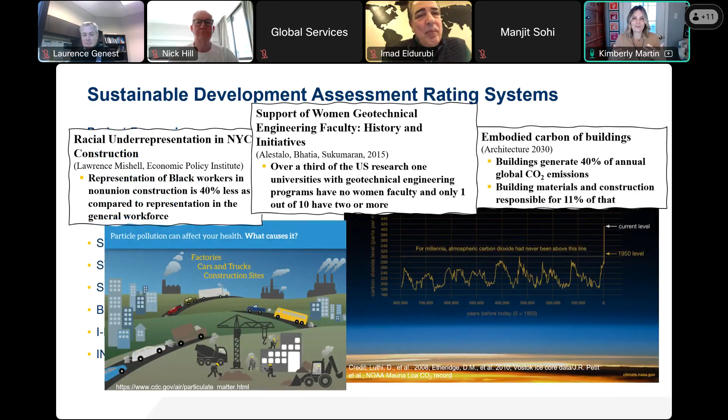So this is just not something a lot of engineers are regularly working on. And I don't want people to think that because we're not working on a LEED or Envision certified project, that project can't be sustainable, because we have a lot of issues coming from the construction, building, and infrastructure world. We're not going to be able to fix this and do better if we're waiting for projects that are LEED or Envision certified. We have to just do better all the time.

So how do we do it? I like to use the United Nations Sustainable Development Goals as a framework for companies and organizations. So instead of saying this project will do this, we can now say, as a company, we're going to do this, and we can take these SDGs and use them as a framework, which many people do.

They also align with a lot of sustainability reporting standards. We like these UN SDGs because they're universal - every country that signed on to the United Nations has signed on to these UN SDGs. And also they're holistic, so they're not just covering the environment, they're also covering social and governance as well.

They can be overwhelming, since they cover everything. There's 17 of them. However, a company doesn't have to choose all 17 to address right at the start.

You can say, hey, we need to really focus in these areas. A lot of companies start with number 3, good health and well-being, because for us in construction, safety falls under that, and that's something we're good at focusing on. Then gender equality, since we know we need to increase diversity, responsible consumption and production, which is really important about resource use, and then climate action, of course. So you can break this down and make it more specific to your company instead of trying to bite everything off at once.

Once you decide what to do, a company can make commitments and targets and say, we are going to reduce our waste, or use more recycled content, and this is what we want to do by this year. We can set that and share it with our employees. Then we can start reporting externally, get a rating and assessment, and be transparent to our stakeholders. When we take this company-centered approach, I think it's much better than the project-centered approach, because now we can say, as a company, we are going to do this, we are going to set targets and do better. And that's going to be on every project and everything we do.

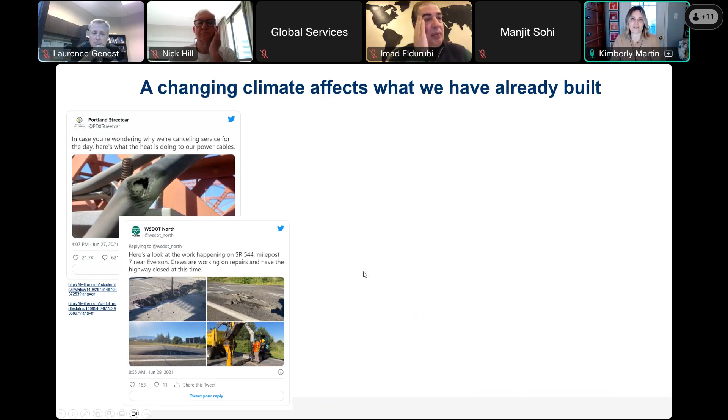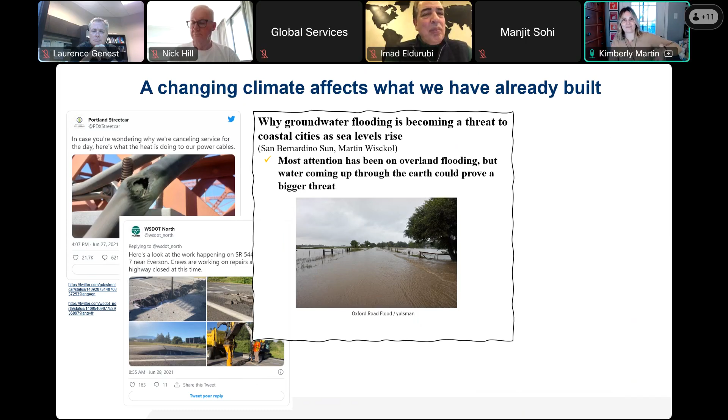We also have things like sea level rise that many of us have heard of, but we often forget that if sea levels are rising, we'd have an associated rise of groundwater flooding right next to that sea level and inland further. We have a lot of things buried underground, like pipelines and tanks, that will now become buoyant and have more buoyant forces acting on them. So that's something we need to think about as climate change happens, but also thinking about the things that have already been put into the ground.

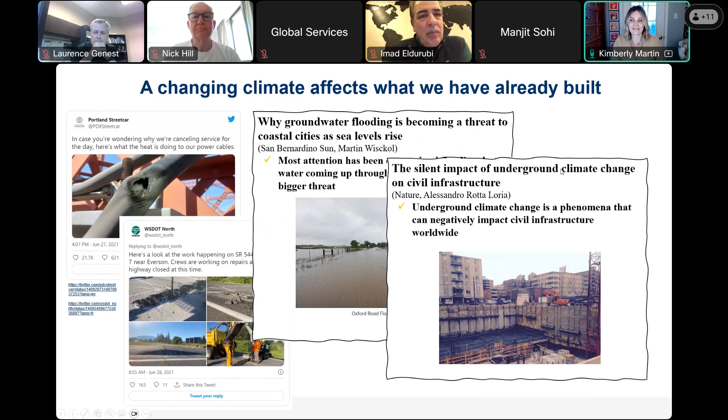There's also really interesting research coming out of Northwestern University by Alessandro Rotta Loria, talking about how we're also experiencing underground climate change. This has been well documented by Professor Rotta Loria in the Chicago area, showing how the ground is drying out from the urban heat island effect, and buildings are settling at an increased rate because of this. So we're often thinking of climate change in the future, but we do have to look back and think about the things we've already built, and hopefully help try to stop this.

Climate change also affects how we work. Many people remember two years ago, the summer the Canadian wildfires brought smoke down into the United States and made it really difficult for workers working outside in the construction industry. Obviously a lot of what we do is outside. But it also happened a couple years before that, where wildfires on the west coast of North America brought poor air quality to the east coast. So when we think about wildfires, that's not an isolated event in the outback of Australia or in the Western United States. That smoke can actually impact how we're going to build and get work done in other places that are unexpected.

Also, worker injuries tied to heat are vastly undercounted. We have to get these buildings and infrastructure built, and that's what we're trying to do, but our workers are starting to suffer because of the increased temperatures during the day. Even further, particularly in climates that are more temperate and weren't expecting such heat, the nighttime temperatures are rising.

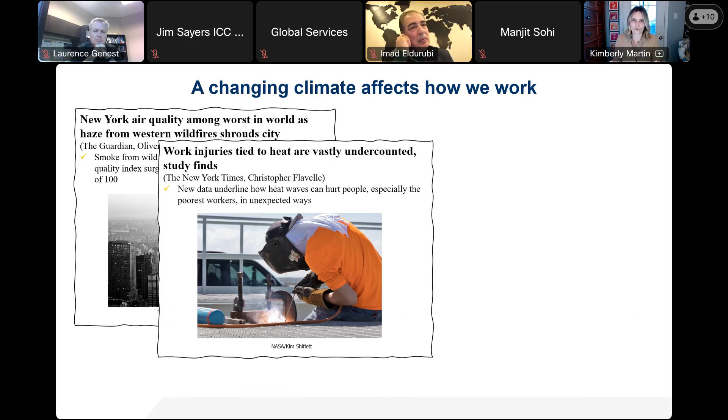So our workers are going to work, getting exhausted, going home. They may not have air conditioning, and now their body's not recovering at night, so that's just leading to even worse heat-related illnesses.

I also want to think about what it means for things like our supply chain. We had this hurricane come through on the U.S. Gulf Coast, slamming the region, particularly Louisiana, hitting them very hard. This had a direct impact on Keller in a couple weird ways. One, we were working in the Gulf Coast and our projects were shut down for upwards of 30 days because of the flooding. But also there are a lot of chemical plants along the Gulf Coast, and we use things like PVC pipes in our drilled shaft foundations for specific testing we have to do, like gamma ray logging. We couldn't get those PVC pipes because those factories were shut down.

So thinking about how climate change is going to affect how we work, it's not just physically how we're going to do the work, but also these supply chains. There's great research out of MIT saying climate change will disrupt supply chains worse than COVID. We could say during COVID it was actually both things, but the best way to limit the impact on supply chains is for companies to be proactive in reducing their own carbon footprint.

And lastly, I want to say that climate affects the types of projects proposed for the future and how we're going to build them. There's lots of money coming from state and federal governments supporting renewable projects and resiliency projects. These are very specific types of funding, encouraging how we're going to build. I heard you talk about home building—there's also regulations about home building and sustainability coming out depending on the jurisdiction. And you have things like New York City saying we're not going to allow supply of natural gas and oil in new buildings being built. So how are they going to do heating? We'll talk a little bit about that later.

So these are the reasons why we need to change. What does it mean? How do we do it? Well, when we approach how we can change what we're doing because of climate change, we kind of look at it in two ways. The first way is adaptation.

I think we see this in a lot of codes—how can we enhance resiliency? We typically see that through armoring and strengthening, controlled failure, relocation. In the geotechnical world, we think about this for earthquakes and liquefaction mitigation, where if we have a building that's going to be built on liquefiable soil, we can improve the soil so the building doesn't fall down, or improve it enough so there's egress in case of an earthquake, or we could just not build there. For those of you, I think there's at least one person from New Zealand, that's what happened after the Christchurch earthquake—there are huge swaths of land where the government said we're just not going to build here anymore because of the liquefaction. So this is adaptation, all these different approaches. What we're trying to do with adaptation is prevent the worst case damage scenario.

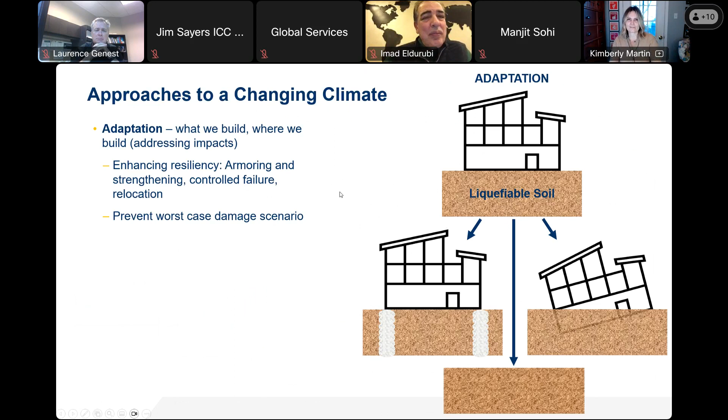The other way to look at it is mitigation, and that's how we build. So here is where we're getting to addressing the cause—our building materials of the future are going to be different, because we need to think about net zero and reducing our own impacts as an industry and as companies.

So here we're considering externalities when it comes to decarbonization. It's not just the materials, and you'll see why in a little bit, but also how much fuel are we using to build something? What's the travel associated with this and what's the carbon impact? What kind of electricity and fuel are we using on site?

And are we designing for the future for the building during construction? So when we mitigate, we want to prevent the worst case climate scenario. When we're adapting, we don't want to do that in a way that makes the situation worse. If we do need to adapt, we want to mitigate at the same time using those low carbon solutions to prepare for the future.

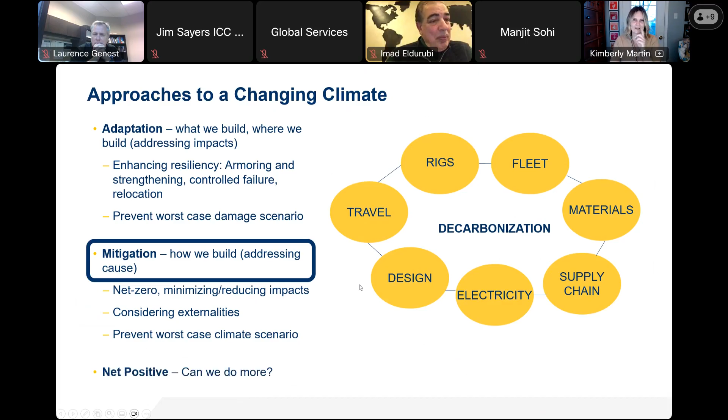I'm going to mostly talk about mitigation today. I'm sure you guys hear a lot about adaptation in terms of codes and adding resiliency, but mitigation, addressing the root cause, is something I think we can have a big impact on, and I'll show you how. I also will touch on maybe how we could be net positive.

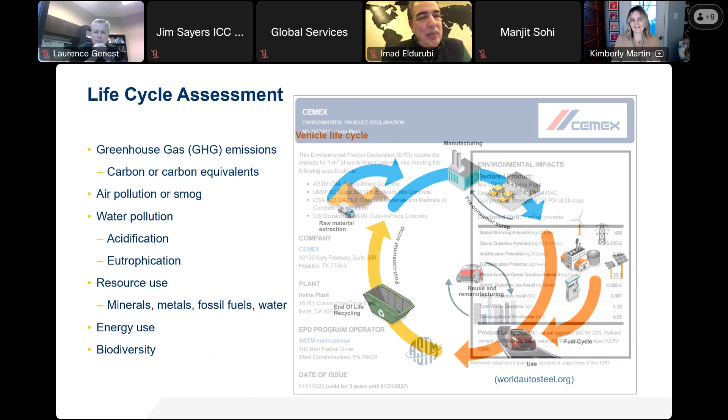You might see this type of thing coming up in the building industry with environmental product declarations. Environmental product declarations come from the suppliers, and they're telling you the life cycle assessment from cradle - resource extraction - to gate, so before that product, once it's finished, before it comes to your construction site, what are the environmental impacts of that product? And they're really, really great. You can see here, just for climate, it'll tell you, for example, in concrete, 1 cubic meter of concrete, in this case with this mix design, has 426 kilograms of CO2 per cubic meter.

So these life cycle assessments are wonderful. They have so much information. For climate, a great place to start is just to look for the CO2 emission. And there's other ways to get that information as well if you don't have an environmental product declaration.

For the geotechnical industry, we have an industry-specific and industry-developed carbon calculator that we use. It's free if you just want to take a look - it's at geotechnicalcarboncalculator.com. But there's a lot of these you'll see coming out of the ASCE in the States, the American Society of Civil Engineers. The Structural Engineering Institute has SE 2050, and they have their own carbon calculator. The Associated General Contractors of America also have their own carbon calculator. So there's lots happening because it can be hard to do this on your own.

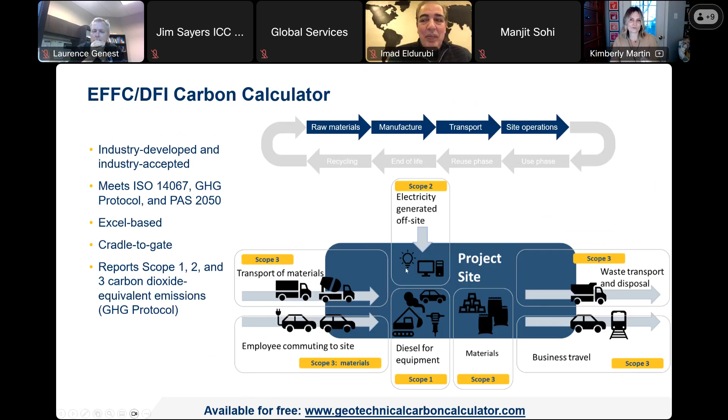Scope 1, 2, and 3 are how the Greenhouse Gas Protocol defines carbon scopes for companies, so you might hear about it. Scope 1 are the emissions from the fuel we use. Scope 2 are the emissions from the electricity we use. And then scope 3 are emissions from everything else that comes onto a site and how it gets there. So these carbon calculators are great because now we can really start to measure it in an easy way.

You can embed things like an environmental product declaration if you know what materials you're using, but also they have the general emissions factors for those materials, the generally accepted emissions factors coming from databases like EcoInvent or EC3, if you've heard of those.

What I like about our industry-specific calculator for geotechnical engineering is it has these simplified ratios. It can be confusing for designers to know how much fuel would be used on a construction site for a specific foundation type. So this calculator can help them use ratios from case studies, so they don't have to know all the information—they mostly have to know materials.

But also these carbon calculators are great because they'll highlight what you should focus on. So in my industry, if you're doing a drilled shaft solution, you'll see that materials are going to be 95% of the embodied carbon of that solution. So if you're working on something like that, focus there. If you're doing a ground improvement solution with stone columns, then the stone itself has less material impact, and you could maybe start focusing on fuel.

So this is how we use them. I think they're just really helpful because most of the tools available online right now for the civil and construction industry are pretty simple to use, and there's lots of videos on how to do it.

Next, when we're going into carbon reduction mode on a project, it's really good to use the carbon hierarchy. The first step of the carbon hierarchy is eliminate—eliminate emissions completely. This could be a virtual call instead of traveling. In our industry, we think of eliminating really intensive materials like concrete, steel, and cement.

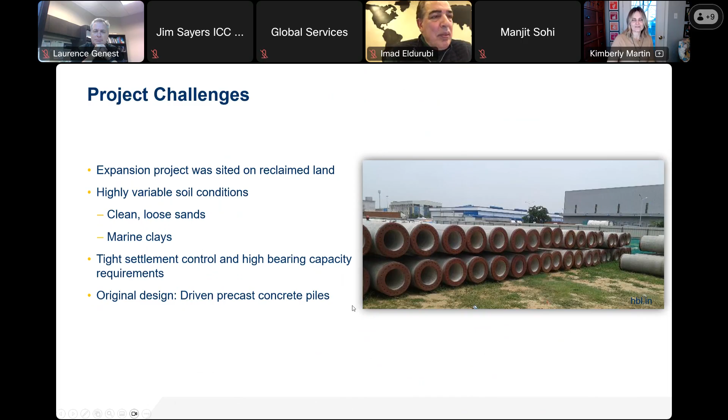Here's just some quick examples of what this looks like in practice. This is a project we did in Singapore for Neste. It was an important owner because they're producing sustainable aviation fuel and renewable diesel, so we knew they would care about having a low carbon solution. The traditional solution in this part of Singapore is driven spun piles—concrete piles, which are energy intensive. What our engineers did is go through and ask, do we need that concrete? Do we need steel? What can we do instead? They came up with a clever alternative solution using compaction and stone to solve the problem, and found it was also faster and cheaper.

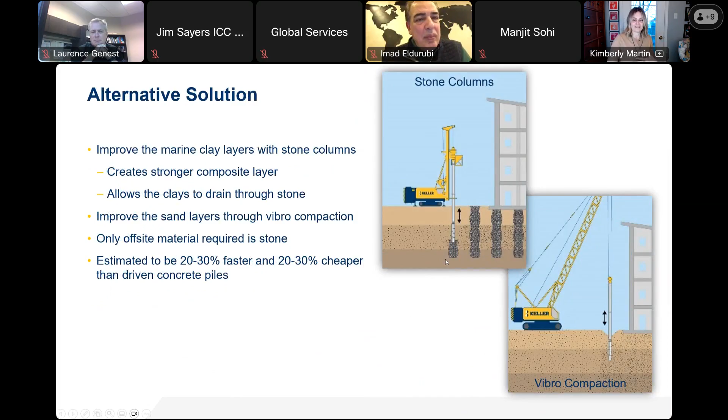So when I'm talking about a lower carbon solution, what do I mean? In this case, it was cutting over 3,000 tons of carbon emissions just for the foundation. I want to break it down into scope 1, 2, and 3, because you'll hear this in the company-centered approach. We didn't have any scope 2 emissions because we didn't use electricity. But if you just looked at fuel use, the vibro technique uses more fuel than the concrete technique.

So we really have to look at the whole picture and say, okay, what materials are we using? What else is happening on site? And you'll see here in scope 3, that's where the materials impact is having, and it's huge. It's really, really big, and we can't ignore that.

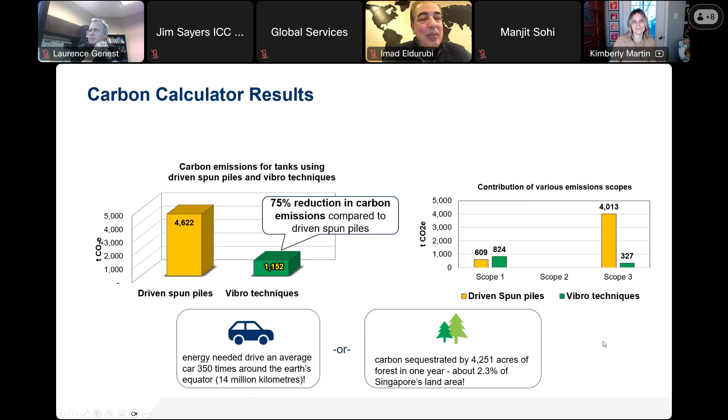So when we cut over 3,000 tons of carbon emissions, what does that mean? It's the same amount of emissions from driving a car 350 times around the equator. And also, it's the same amount of emissions that would be sequestered by over 4,000 acres of forest in one year. So it takes a lot to mitigate that level of emissions. And this is one construction project.

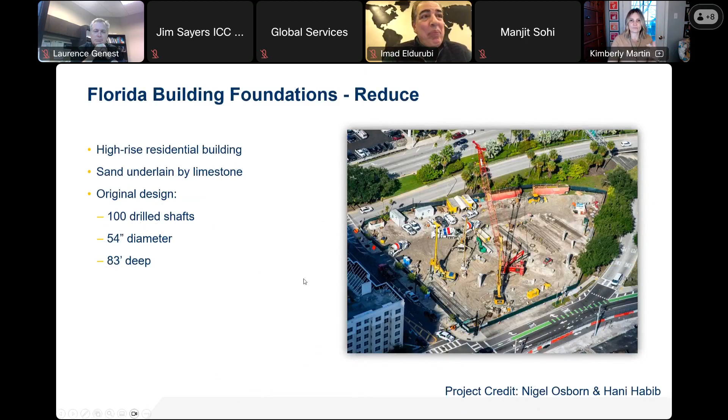Next, I'll show you an example of reduce. So this is in Florida, where we have a traditional, kind of standard high-rise residential building built on sand underlain by limestone. So these would be drilled shafts, which is a concrete solution. Our team recognized that the quantity of shafts was fixed because they were supporting the columns, but they could drill deeper into more competent rock and then increase the strength of the concrete and reduce the diameter, to have better compatibility between the concrete and the rock.

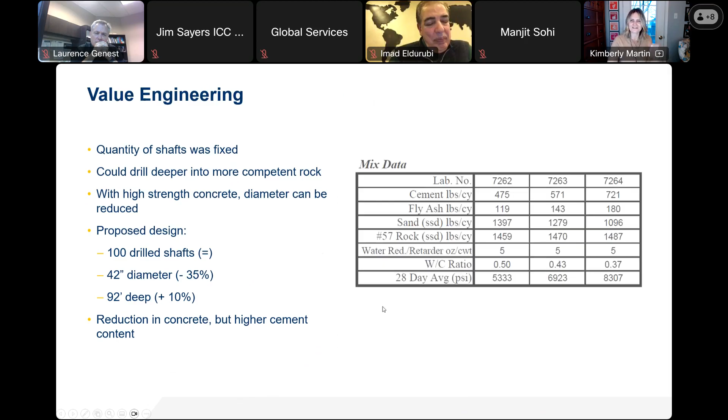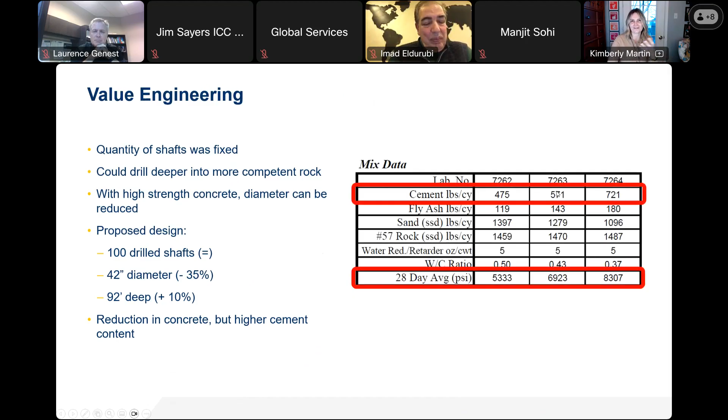So they were able to reduce the diameter by 35% by going 10% deeper. So they knew they had a reduction in the total amount of concrete. But if you know about concrete mix design, as you increase the strength, you increase the amount of cement. And cement is the part of concrete that has the highest carbon contribution. So they wanted to know, does that actually reduce the carbon? And we did the calculation, and sure enough, it did. It was a 10% carbon savings, and schedule and cost savings as well.

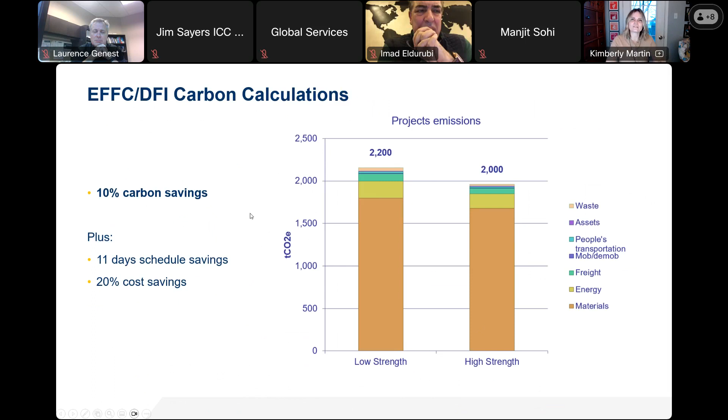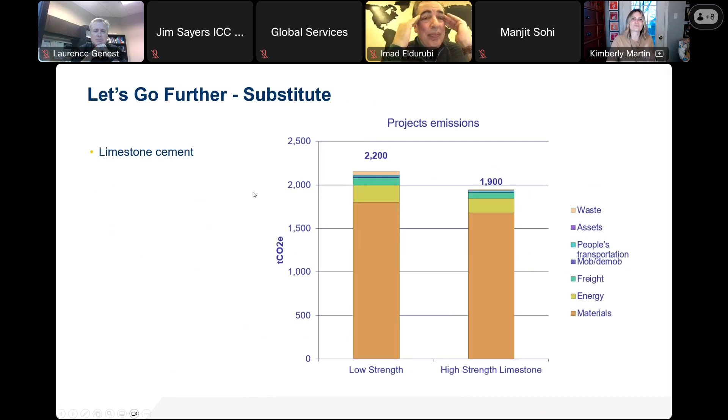But I wanted to push them further. They'd done that really smart design, but what happens now if we substitute? So instead of using type 1-2, what if we use type 1L cement? That's the limestone cement, 13% limestone. They could reduce another 100 tons. What if they were able to get 25% slag to replace the ordinary Portland cement? In that case, they could reduce another 300 tons, or going all the way to 75% slag blend. Now they're over 1,000 tons cut from the original.

Again, that's over 1,000 tons of carbon, the same amount sequestered by 18,000 tree seedlings grown for 10 years. So recognize the impact and try to mitigate that. And also, my company does about 7,000 projects per year. So if on average, we could cut as a company 1,000 tons on each project, it starts to add up and make a really big difference.

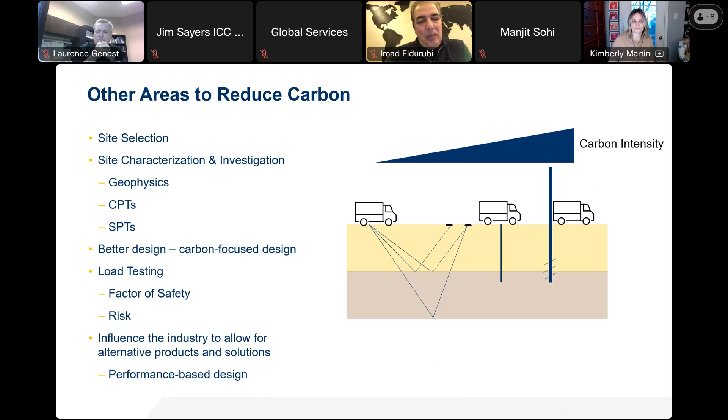Okay, so I do want to do a little bit of forward thinking here. I'm going to, if we're okay on time, just think about energy and carbon sequestration from a geotechnical perspective, kind of where we could go from here and how we could do more.

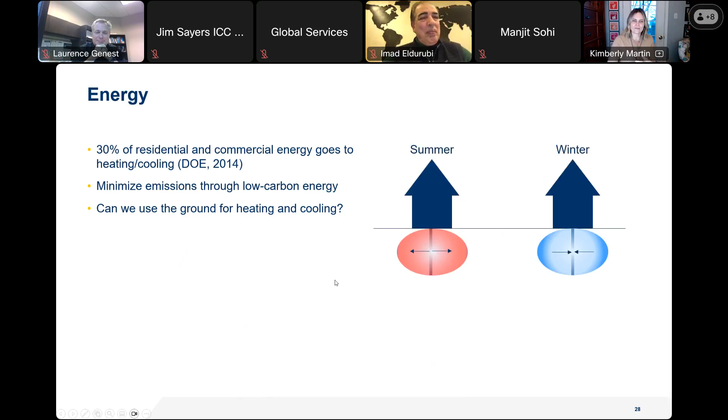So one thing for energy that's very exciting for us is using the ground for heating and cooling. And by us, I mean geotechnical engineers, but also anyone working in the building industry. So what does this mean? We want to be able to use ground source heat pumps to reduce the amount of energy that's required for a building. And we can do this by putting these loops into the ground, these geothermal loops. It's pretty common, you see them, geothermal loops, kind of separate typically from a building, off to the side, like you can see here in the closed loop borehole system. But we can actually put those loops in the foundation system we're already building.

And we call these energy piles. So it's kind of a double use element.

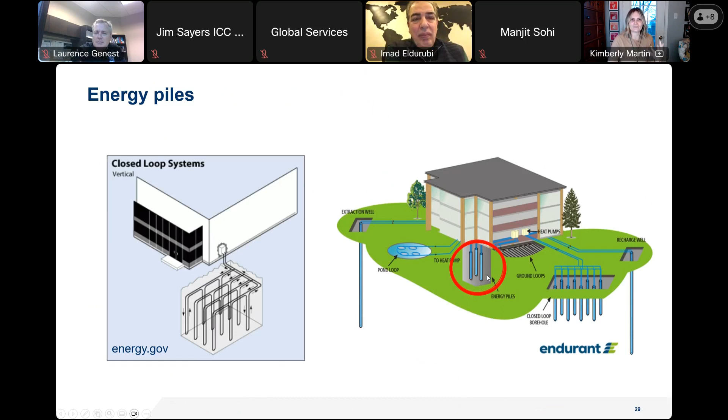Here's an example of energy piles in Germany. We've seen a bigger uptake of energy piles in Europe. What they're doing is saying, hey, we're already building a basement wall, so we can excavate down, and we're doing that with secant pile walls. We're already putting the concrete and rebar into the ground. Why don't we add the geothermal loop and put those geothermal loops into the ground, thereby providing heating and cooling to the building? It's something we were already building.

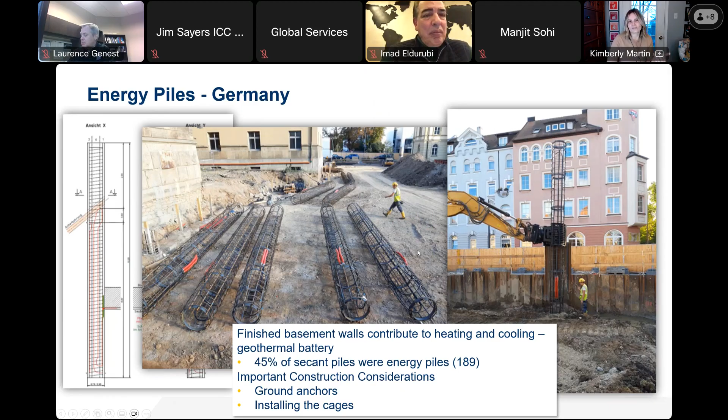So we did that. It was a little bit challenging technically because we had ground anchors going through the wall. But at the end of the day, it didn't add that much effort to the secant wall, basement wall design and construction. And now we're providing maybe 20 to 30% of the heating and cooling capacity for that building.

So why aren't we using energy piles all the time? I think a lot of people just don't know about them, but it's also understanding how they would be used. They're different than ground source heat pumps where you potentially could provide 100% of heating and cooling. This would be in the 20 to 40% range, and you just partner them with an air source heat pump. So it's a different kind of HVAC partnered system.

And you do have to monitor the ground. In hot places, you could overheat the ground; in cool places, you could underheat it, so you can't provide the heat in the winter. And you do need to know a little bit more about soil than you would normally do for a standard project because of the heat capacity and heat exchange.

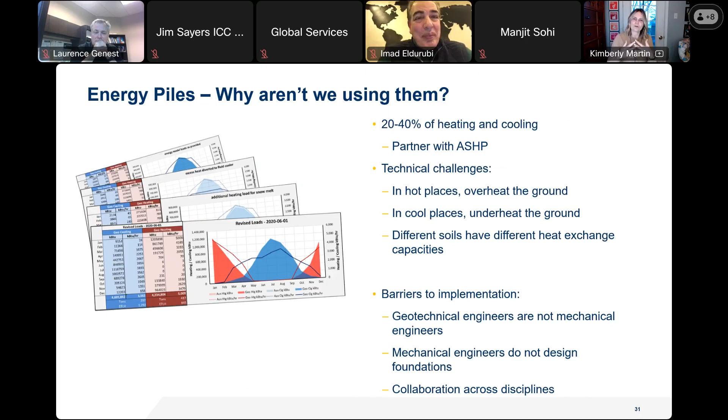So the barriers to implementation, to me, are that the geotechnical engineers designing the foundations who might know about energy piles aren't mechanical engineers, so they have no idea what the HVAC system is for the building. And on the other side, the mechanical engineers often have no idea that the foundation could provide heating and cooling capacity for them. So this is just a case of, if we want to be more efficient, if we want to have better resource use, even if the grid is greening, we probably should still use less energy overall, which this can do. This is just one example where if we collaborate across disciplines, we can achieve those goals for the future.

Another fun thing to keep an eye on is carbon sequestration. So what can we do with that? This is a project that I worked on in my PhD, but a lot of you'll see kind of biocementation up and coming, and this is biocementation in the ground to improve the ground for the structure.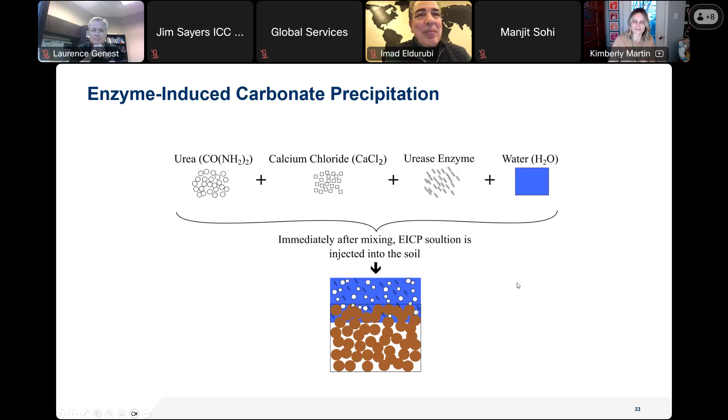Basically it's taking a water solution with urea, which is a fertilizer, calcium chloride, the urease enzyme and water, and injecting it into the ground. Once in the ground, the urease splits the urea and you can precipitate calcium chloride, calcium carbonate, which is essentially limestone, into the ground, cementing the soil particles together.

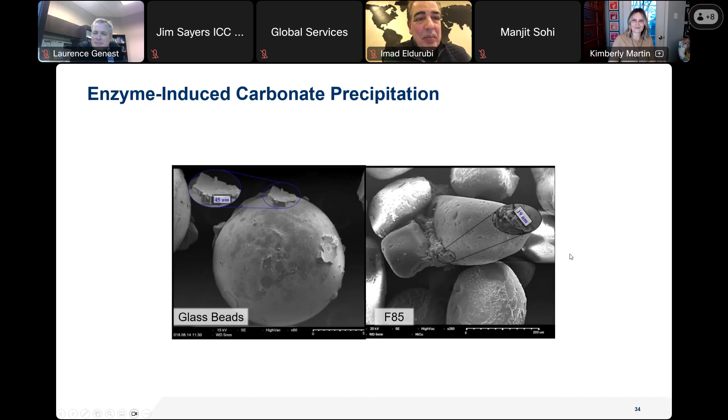What's fun about this, here's the calcium carbonate you can see under the SEM, binding the soil particles together. And here's actually my research showing how we do that in this beach sand. What's fun about this in the future is right now urea is derived from natural gas, so that's not great.

But if we can instead get that carbon dioxide from another place, like direct air capture or from an industrial waste product, then when we take that CO2 and we capture it as calcium carbonate in the ground, we're now doing carbon sequestration and improving the ground. So instead of dumping carbon, in traditional carbon sequestration, putting it deep into the ground as a storage solution, now we can actually use it to precipitate minerals that provide a function for the building industry. So that would be mineralization.

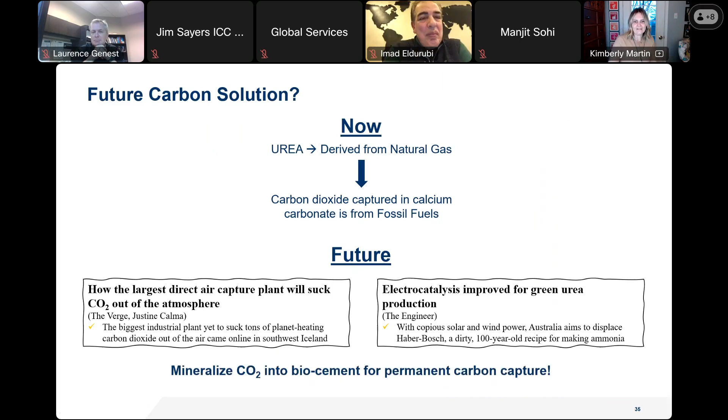So these are really cool things. Who knows if either of these things are actually going to really take off? But the point is that things are changing and there's so much possibility.

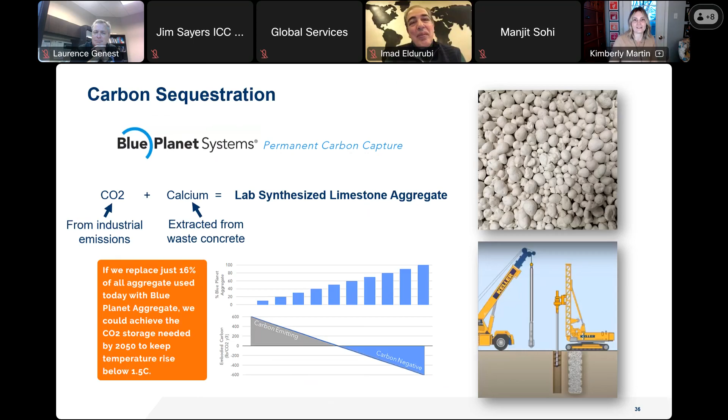Right now, I think the building and construction industry is thought of as a net negative for the environment, when ultimately we might be thought of as a net positive. So my conclusions on carbon are: we can reduce carbon on every project. It helps if we can calculate the carbon, because that leads to reducing it and knowing what we're doing.

A lot of our carbon reduction efforts, particularly at the start, are going to save cost and or schedule. Designing better, putting less into our buildings is going to be good, but also being safe from a code perspective. But there are challenges, right? Collecting data to support innovation and new ways of thinking so we can put that into a code and make it acceptable.

What do we need to do? We need to be clear on the path there. It can be hard from a construction perspective to change designs late in the game. We may have the best ideas, but if we're too late and the project is too far down the road, we can't implement them. So we need to get in early and be thinking with that carbon lens earlier. Also, sourcing materials can be hard.

In my community, I know we need to work together on this effort, but also we have to engage other disciplines, and that's really going to be the future. How much better can each discipline do on their own is limited compared to if we come together. And lastly, I think geotechnical engineering, but also the building industry, can ultimately have a net positive impact.

So I'm actually just going to stop there because I know we're close on time and I want to leave a couple minutes for questions. But yeah, that's mostly what I have. So I'll stop sharing and open it up.